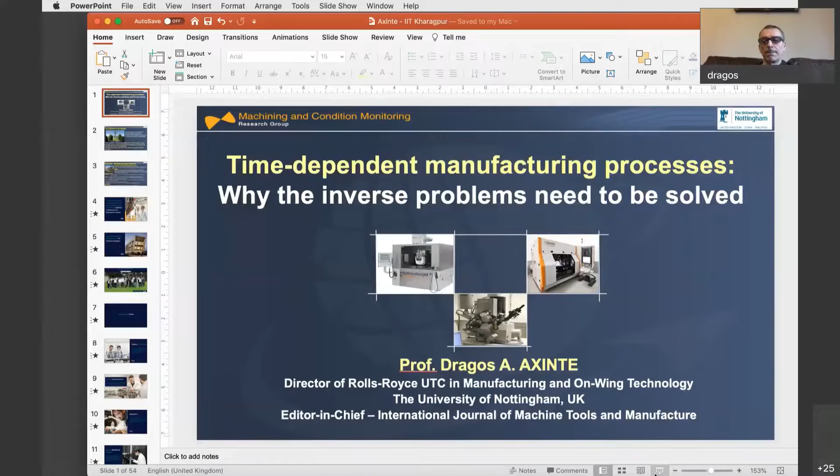Thank you very much first for the introduction. So let's clarify, my name is not Professor Axinte, my name is Dragos. Today I was a bit unsure what topic I should be presenting, because I looked at the history of what has been presented before, and I saw that my main topic is machining, but other reputable researchers have already made presentations related to machining, with surface integrity and so on. Although that topic is closer to my heart, I said let's change the pace and try to attract the attention of the young generation, the research community, to some interesting problems which might come from time-dependent manufacturing processes.

I will try to emphasize the need of solving the inverse problem. From time to time I might use a bit of stronger language criticizing why people have not been thinking about some topics, but that's how we should do a literature review - with a critical eye, otherwise there is no progress.

So my name is Dragos, and I'm also the director of Rolls-Royce UTC. Probably you might not know that it stands for University Technology Centers. Rolls-Royce has over 20 research centers around the world, and we are one focused on manufacturing on-wing technology.

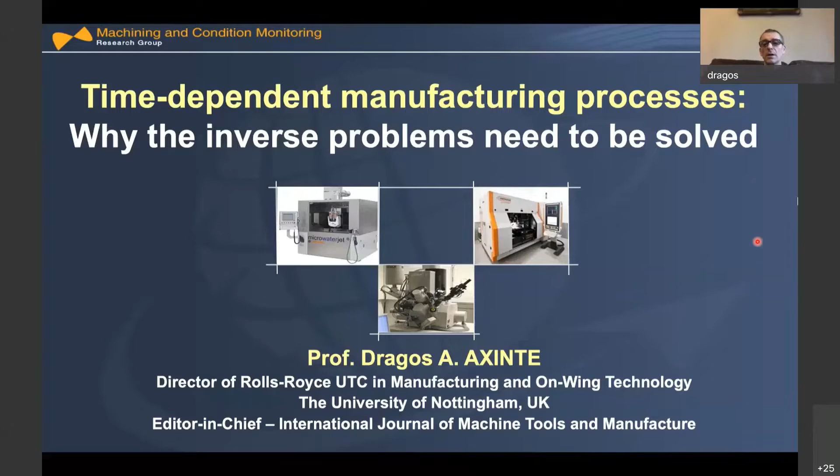I will make a short introduction. First, University of Nottingham, just to give you an idea - we are ranked number 8 in UK as a research power, and around 20% of our research comes from industry, with a good percentage of research considered at international standard. You might ask, who said that? The UK has a research body which evaluates us every 7 years, and actually now we are waiting for the new research assessment exercise results to come out.

So you can see, I'm presenting my group.

First we have Rolls-Royce UTC, which is a main source of collaboration. At the moment we're running over 30 projects with the company. We get funding from EPSRC, our research council, and we've been coordinating a good number of European projects. We also get money from industry, and from a body called Innovate UK, which is more applied research. So we have a mixed portfolio of research income.

Just to give a bit of introduction to what we do under our Rolls-Royce UTC, we have been established more than 20 years ago. Actually, we are the only research center in the world which has a full Trent 1000 engine for demonstration of our technology. The picture you see here is actually a full engine, in our labs.

What we do, we are based in the division of manufacturing. This is the new building we are in at the moment, and this is group 20. At the moment the group is over 40 people, and we have different strands, which I'm going to present shortly. One is robotics for in-situ repair.

That's why our UTC is called Manufacturing and On-Wing Technology. Just to give you an idea, sometimes the inspection of very complex installations needs to be done, and in some cases it's very advantageous not to dismantle the installation. So imagine an engine on the wing of an aircraft.

This is inspected at regular intervals, and if defects are found—for example, a blade that's been distorted by the engine ingesting a small stone—the airfoil might be a bit distorted. There's a particular procedure: this has to be blended, so the indentation is removed. And for that, there are no such tools currently available.

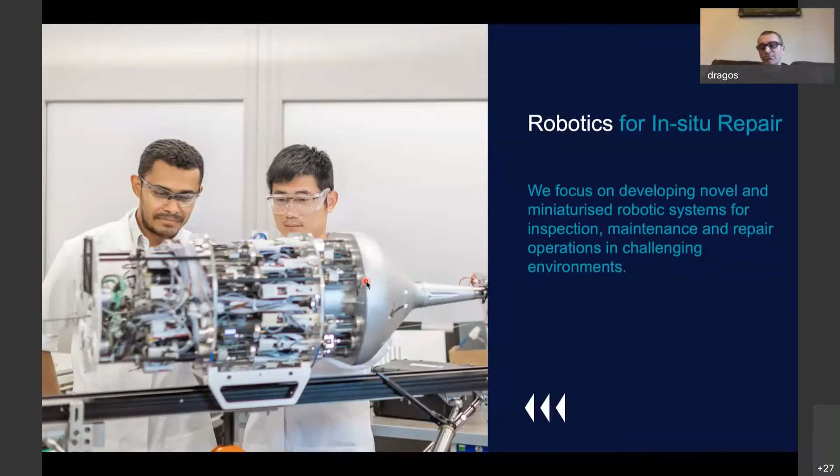Next, we do innovative tooling and fixturing within the Rolls-Royce UTC. Why do we do this? You can buy the most expensive machine tool and the most performant cutting tools, but if you don't position the workpiece relative to the tool precisely, or if the workpiece starts vibrating, it's not the best solution. Most people spend a lot of time looking at how to minimize vibration, for example by adjusting cutting parameters, but very few people have looked at how to do that from the workpiece point of view—that means the fixtures. So we've spent more than 10 years developing innovative fixtures for the company.

We also have a group in mechatronics, and you can see the robotics ties up very nicely with the mechatronics. We make systems which can get in situ on large structures to make repairs, and also end effectors. Because if you want, for example, to make deposition of a material—to give you an idea, to make this in-situ repair in the gas engine, you have access ports which can be as small as 10 millimeters or less. So how do you introduce a tool there? You might have a snake arm, as I mentioned, but you also need an end effector which has to be small. So we don't work only on robotics, but also on mechatronic systems and miniaturizing end effectors.

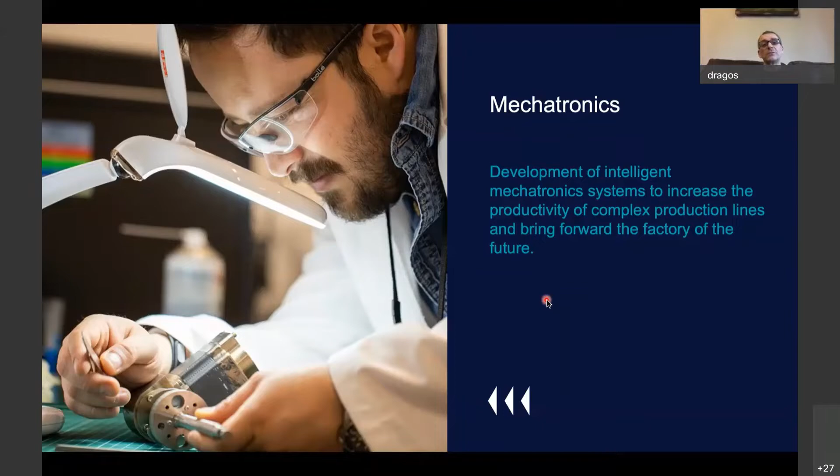We also deal with advanced manufacturing technologies, and our lab has quite extensive equipment, from 5-axis machine tools to lasers ranging from micro to femtosecond. We have 2 water jet machines, EDMs, so we are very well equipped in this area.

But what makes us somewhat different from most machining groups around the world is that we have facilities in-house for advanced material analysis—SEM, TEM, focused ion beam, EBSD, TKD, all these techniques. Our guys do it themselves; we don't rely on external material people. Everything is done in-house.

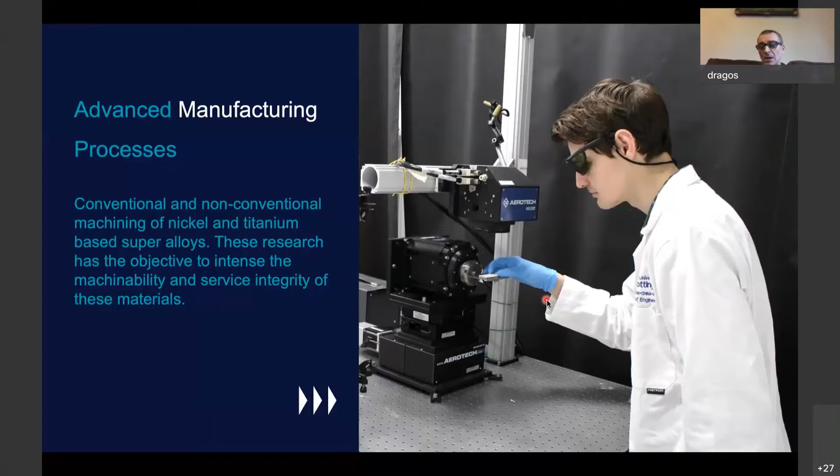So what we make there is the link between manufacturing technologies and understanding what happens at the material level. I was supposed to talk about time-dependent processes, so let me start by making you aware what I mean by time-dependent.

Let's consider an energy beam, which can be an abrasive water jet, a laser, or a focus ion beam. These are three very different processes, but what do they have in common? Nothing else than being an energy beam. They have an energy density, which we can measure by some means, and a time exposure on the surface. These three processes I will refer to throughout my presentation.

They are time-dependent processes. Let's compare a normal milling operation to emphasize what time-dependent means and its implications. If you move a cutting tool on a path, stop, but keep rotating the tool, material is not removed. But with energy beams, whether you stay in place, accelerate, or decelerate, you keep changing the eroded material.

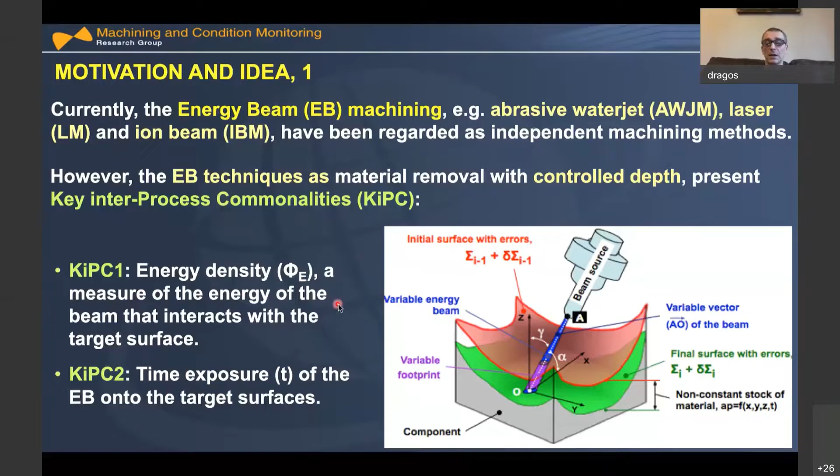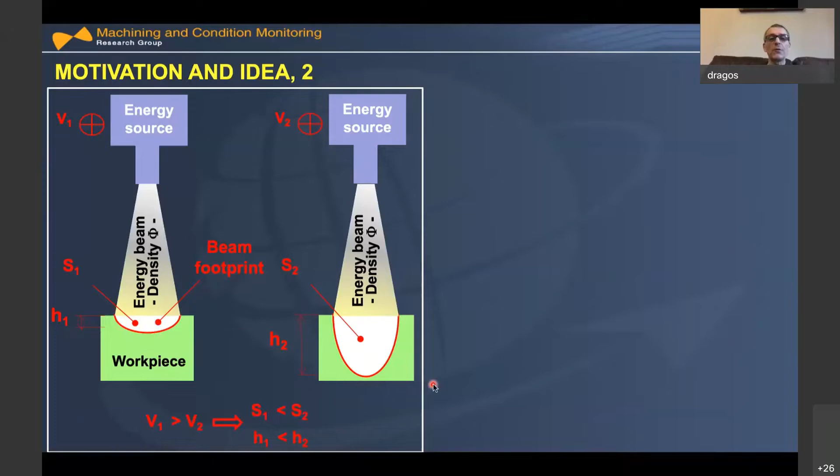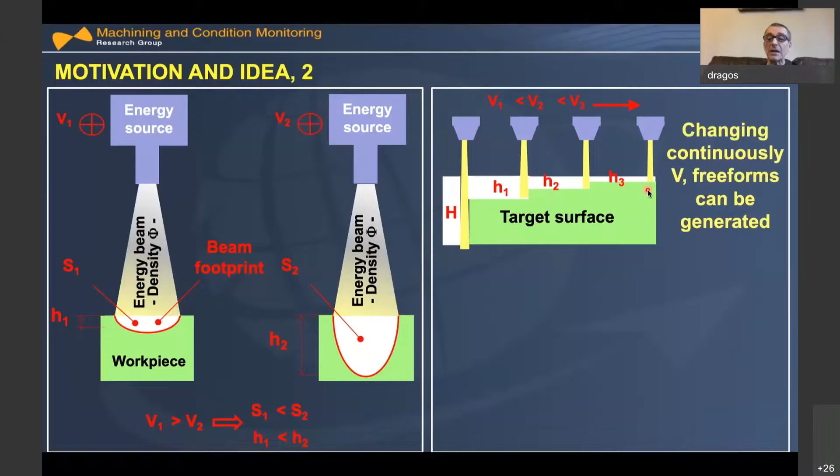If you go very, very slow, you can cut the material, but if you go a bit faster, you remove less material. So what is the philosophy behind this? How should we deal with time-dependent processes, for example beams which remove material?

Shall I try to change the operating parameters, like pressure pump for water jet? If you change the pressure, what happens? It will take some time - there's a time delay from when you change the pressure to when the penetration or footprint changes. So you cannot generate very complex shapes this way.

It will be much easier if I continuously change the feed speed instead. It's like cleaning a patio with a high pressure jet - if I go slower, I remove more; if I go faster, I remove less. So what's the strategy behind this?

If I change continuously in a way that I have a model linking exposure time with how much material is removed, and especially the shape of the footprint, I'm in business - I can generate very complex shapes. That might be the first part of the story, but if you don't start from a flat surface, the problem becomes very, very complex.

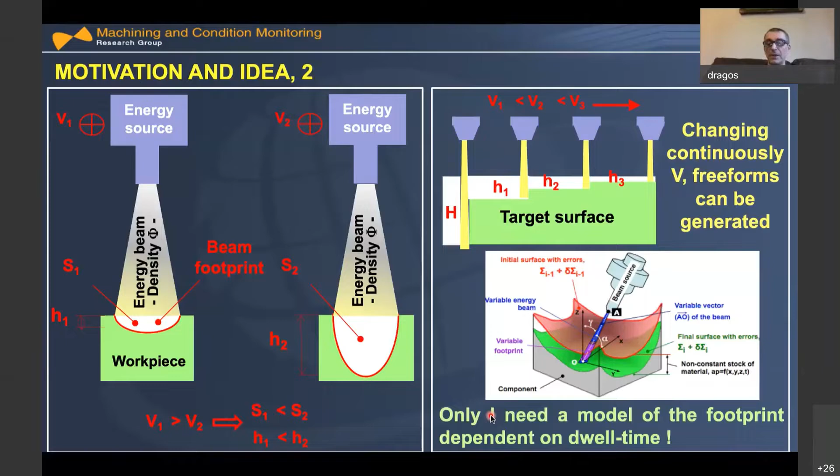So what I'm trying to get to here is there is an absolute need to know this shape, how the footprint of any energy beam looks like for removal of material, dependent on time. We will give some hints how this has been done. We have been publishing for more than 10 years about this topic. I think the motivation is, it's very difficult to generate free forms by water jet, laser, pulse laser. With pulse laser, I have pulses and I remove material and have to superimpose these pulses, and also for focused ion beam.

We developed a modeling framework which can address these challenges, and we proved this, published in Science Advances some 4 years ago. So here is more or less for the show.

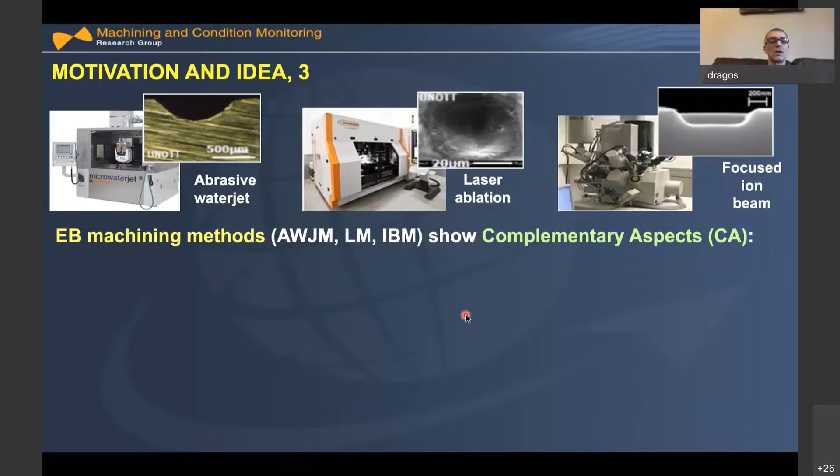We wanted to say that these three processes are complementary, and I will go a bit fast here. Dimensional accuracy - with water jet you might not obtain very precise surfaces, and what one process can do, the others cannot. For example, focused ion beam requires vacuum, while this one cuts any material. Anyway, I'm going faster here.

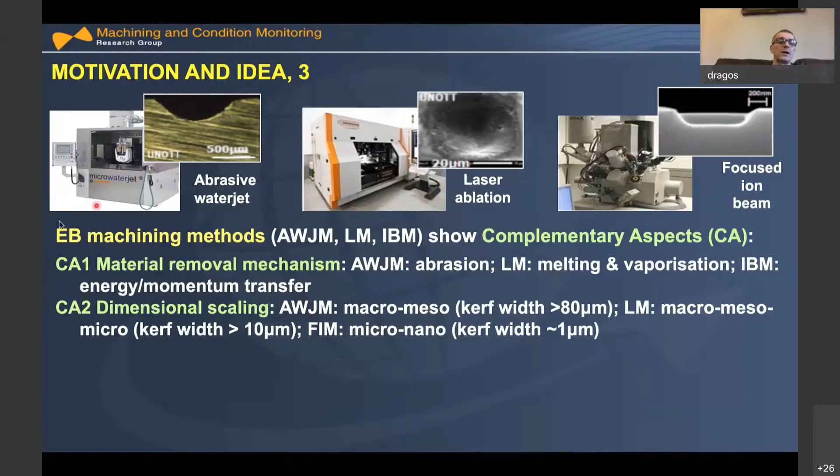The motivation - but what I want to bring you is this: why do we need this model? Why should it not be possible to just try different parameters, trial and error, and so on?

Here I'm presenting results from one of the projects with one of your colleagues from IIT Madras, Dr. Srinivas Devadula, done with us nearly 10 years ago. We did some milling on silicon carbide composites and titanium 6-4. You can see these are quite simple features - this is a pocket in composite material, here a ramp surface, a conic, a frustum, and a hole.

How we generated these surfaces - we tried different beam paths and adjusted the cutting parameters, switching the beam on and off.

Actually, I should have taken a piece of paper. Oh, just one sec, just one sec. I should have taken a piece of paper. Let me see where I have a piece of paper. Okay, yeah, good, just wait for me.

Yeah, sure, how are these surfaces generated? Look what I'm doing, guys - this is a Christmas card. I'm destroying a Christmas card.

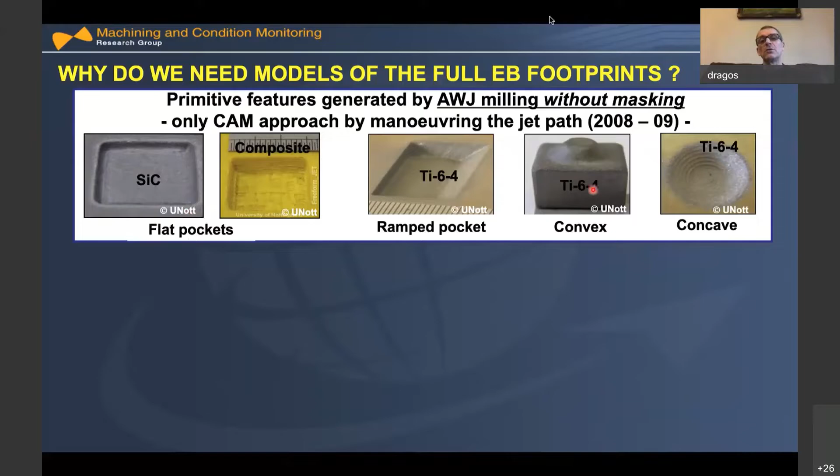When it came to pulse laser ablation, we had some ideas. Here you see some pictures of ablated surfaces on titanium diamond structures. What we wanted here was to generate some abrasive tools with controlled shapes of abrasives.

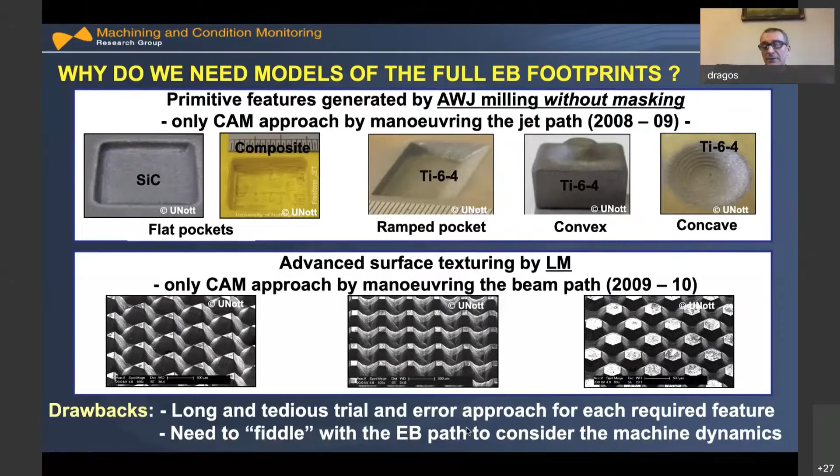Once again, we move the beam here without any modeling. It took us some time to arrive at these shapes. So what I'm trying to convey is that it's not rational to try different parameters this way. It would be so long and tedious, it takes a lot of time to adjust the parameters and move the beam intuitively.

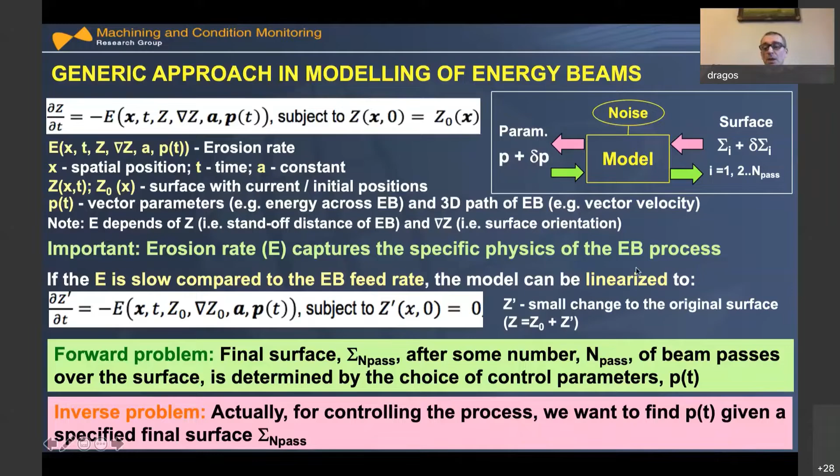So the forward problem is clear. Here's an example with a water jet: we have a jet which has to follow a path with a particular orientation. So first we try to solve the direct problem, because once you solve the direct problem and have the equation, then you can try to address the inverse problem.

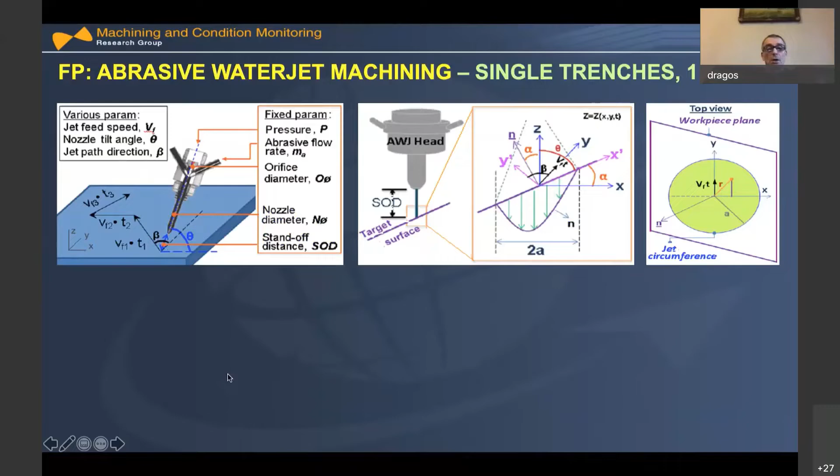So to keep it simple, this is the footprint, which depends on time, the orientation of the jet, and also the etching rate.

What do we mean by etching rate? Let me make it clear. What parameters am I keeping constant for the water jet? I'm keeping the pressure constant, because I cannot change the pressure very fast in the pump, and even if I change it, it will take a while until the velocity of the jet changes at the exit of the nozzle.

I'm also keeping the abrasive mass flow constant, for the same reason, since there would be a delay from the time I change the mass flow of the abrasives. I'm keeping the orifice diameter and nozzle standoff distance constant. What I'm varying is the feed speed, the orientation, and the jet path direction. The feed speed is nothing else than time.

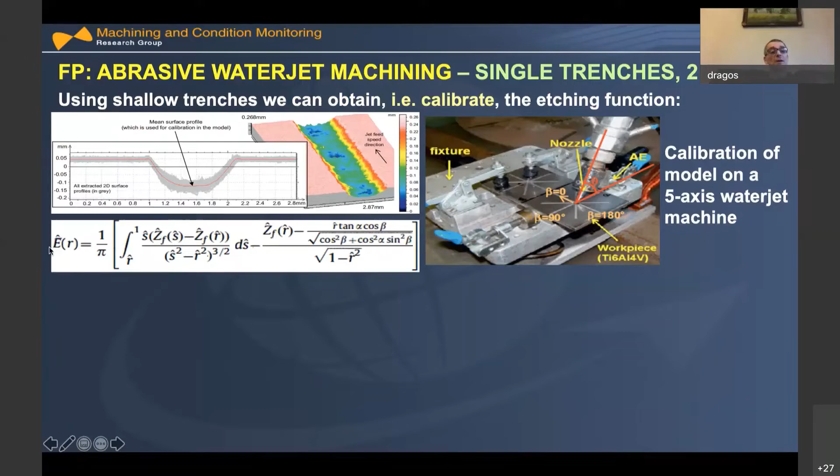So the whole idea is: I make a single footprint, a single trench, at high speed. I linearize the equation. I scan the footprint, and since I know the shape of the footprint, I can calculate the etching rate. With the etching rate, after that, you can predict.

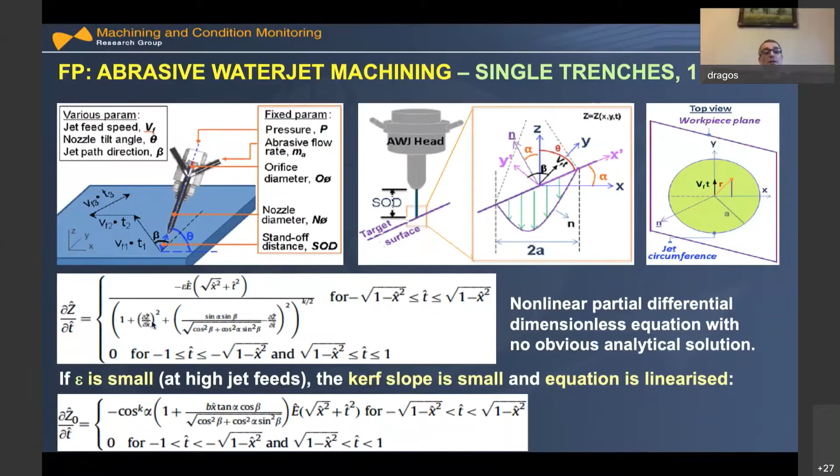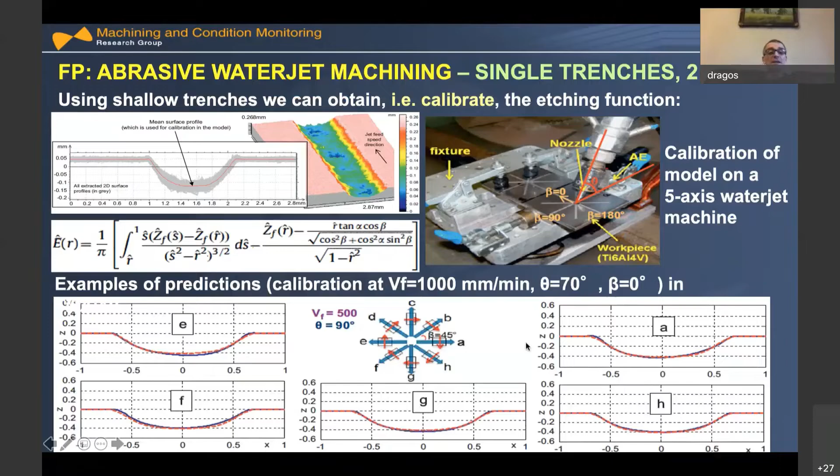Let me go back. If I know the etching rate here, after that, if I change the time, meaning the velocity, I can calculate how this trench will change with different feed speed. So it's exactly what we prove here, that with the calibration for the etching rate, we start changing different velocities.

So once again, what is the principle of this one? I include all the physics of the material removal for a particular energy of the jet, meaning pressure, in this case for water jet. And I calibrate this etching function. If I calibrate this etching function, I can use that generic formula, which takes into consideration the time, how the jet footprint varies with the time.

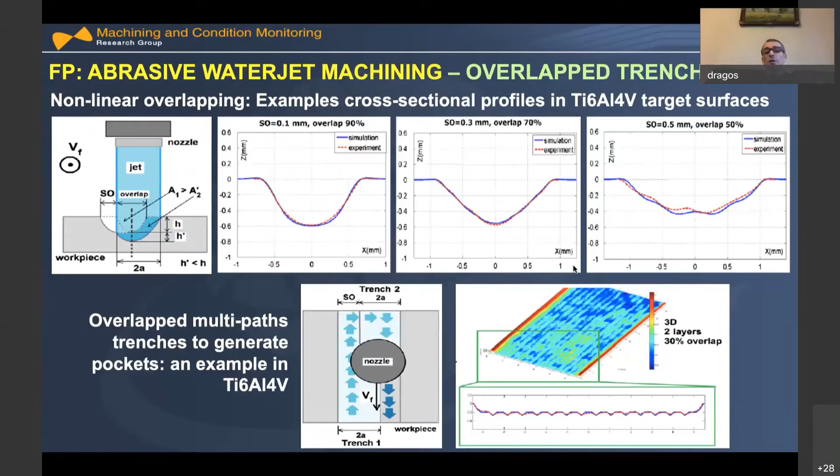Okay, so that is for the water jet. I will have some proofs later on of more complex surfaces, but the first example for this dwell time or time-dependent processes was water jet.

So I have a series of pulses, and each pulse will remove the material. So initially, I will make the story short here. Initially, what we have done, we try to model the surfaces you try to obtain by a series of pulses, individual pulses. So I say, okay, I have a pulse, I model a pulse, or a footprint from a single pulse.

And after that, I try to overlap them. You can see I have a pulse, we calibrate in the same way, we scan it, we see the etching rate, and after that, what we try to overlap it one by one.

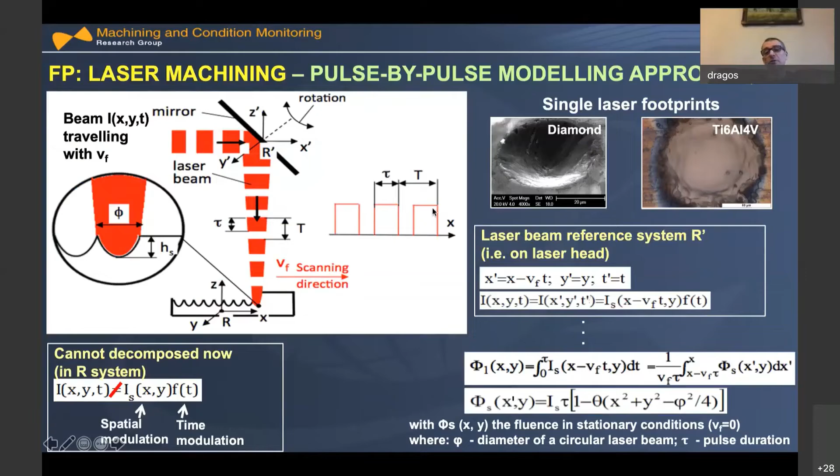Going back here, you can see the scale of this one is 20 microns, for example. So it's 40 microns, 50 microns, okay, 60 microns here. Now, if you want to generate a surface of millimeters, you can imagine how many pulses you have to simulate. You have to simulate one pulse, another one.

So it's basically what we say here, simulating and overlapping the pulses. Here the model has been verified only on linear trenches. So we said, okay, this might look okay pulse by pulse. Nevertheless, the situation becomes even more complex if you don't have a target surface which is flat.

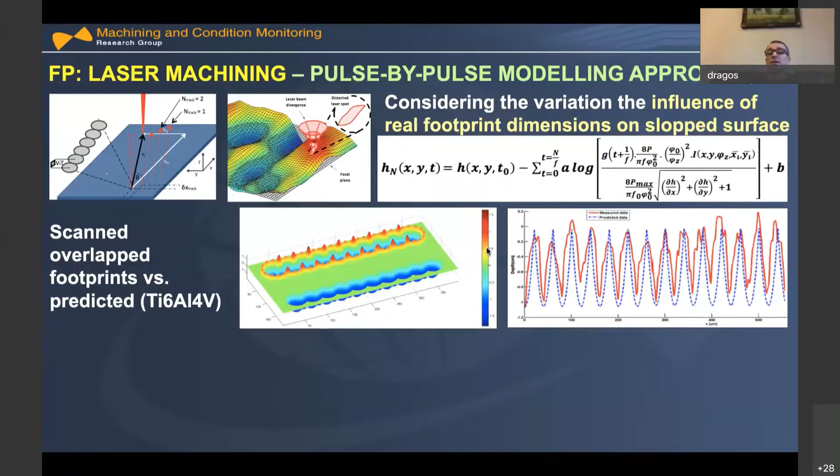So here with the same pulse by pulse, we try to simulate what happens, how is the resultant surface, simulating pulse by pulse. Remember, we are still talking about forward problem, meaning I decide the path, I know how it's the pulse, the footprint, and I overlap these footprints along the path.

And say, okay, I hope I will get a kind of satisfactory prediction. But this is a very simple path, it's a linear path. Of course, here I have some noise from the material redeposition because titanium 6-4. And here it's an example of a surface and error more than 10% between only a flat surface.

So the strategy here again was simulate pulse by pulse. You might need to simulate this convolution of a single pulse along the path, probably millions of them, which is computationally expensive, and probably, you can see also is not generating fantastic prediction. It's on a flat surface.

So, but we had after that we were thinking, actually, do I want to simulate such a thing? Meaning pulses which have a very little overlapping, but pulses with very little overlapping do not generate a smooth surface, right?

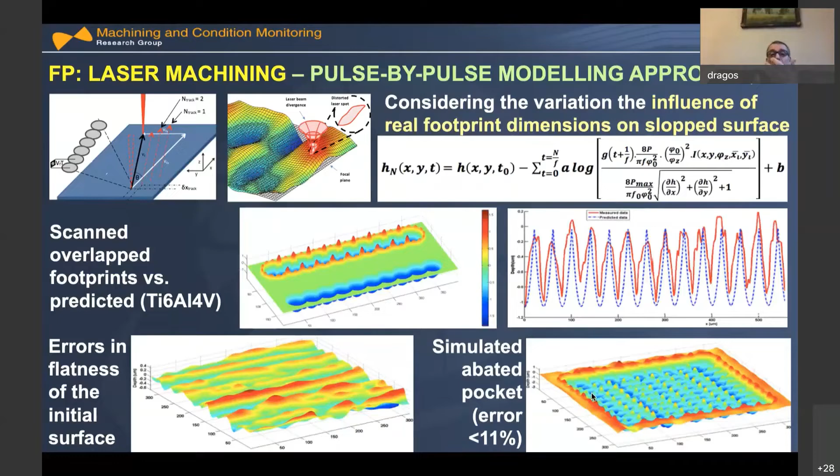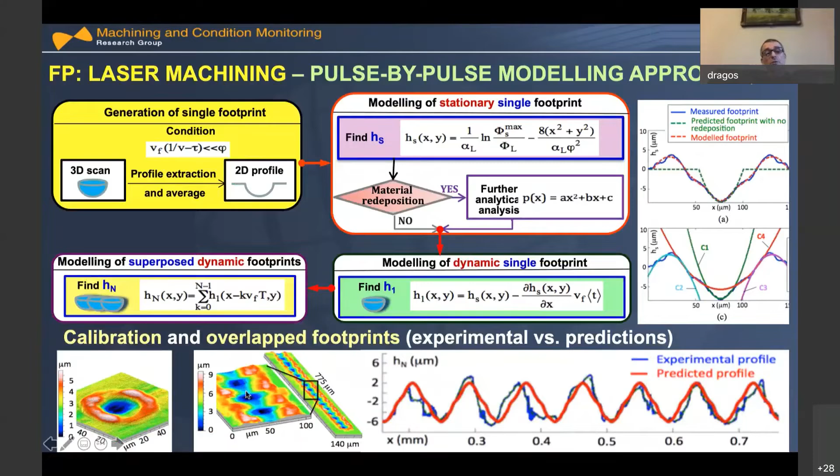So if I have a big distance between two pulses, yes, they have an overlap, but you can see here, I go back on purpose, if here it's wavy, we did this on purpose because we wanted to calibrate the model. But if you come closer with the pulses, what you will obtain? Actually, you will obtain a trench.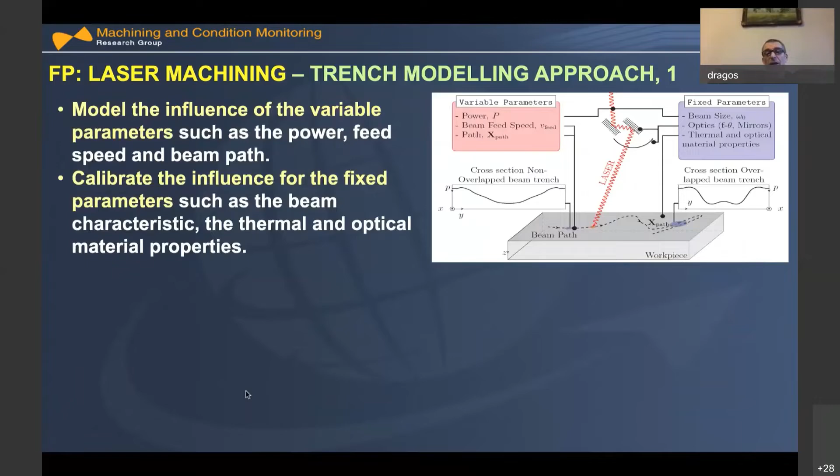So we were thinking, if we want to simulate a trench, is more or less the same as a water jet. Why should we be simulating pulse by pulse? I'm interested to generate smooth surfaces. If I want smooth surfaces with a pulse laser, what should I be doing? I should be trying to simulate trenches with the pulses, although they are individual pulses.

So here, once again, we came with the same idea. The trench, which is the footprint of the jet, results from many individual pulses, but with very large overlapping, so it comes out a smooth trench, more or less like a water jet. I have an etching function which will depend on pressure, on the power, feed speed, and the path. What we have done here, this etching rate is nothing else but how the material reacts to a particular energy of the laser, a particular standoff distance.

And here what we wanted to say is this etching rate depends on the power, feed speed, that means exposure time, and radius. What will the depth of the trench depend on? It will depend on the feed speed, how the trench will depend on overlapping, and how the trench will depend on the width of the overlapping.

So what we wanted to say here, we separated this etching function into one which depends on the power, and one which only depends on a generic shape of the profile. So what we do, we have 1, 2, 3, 4. So we have 4 unknowns for calibrating this etching function.

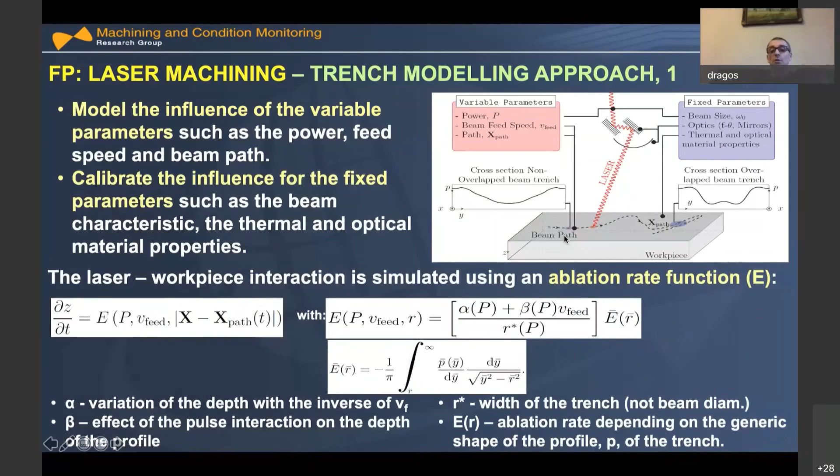So what we have done here, again, we did some trenches with a constant speed, we scanned them, and after that we had to make 4 trenches because we have 4 unknowns. We make 4 trenches at different powers, and after that we calibrate these parameters, alpha, beta, R, and etching rate.

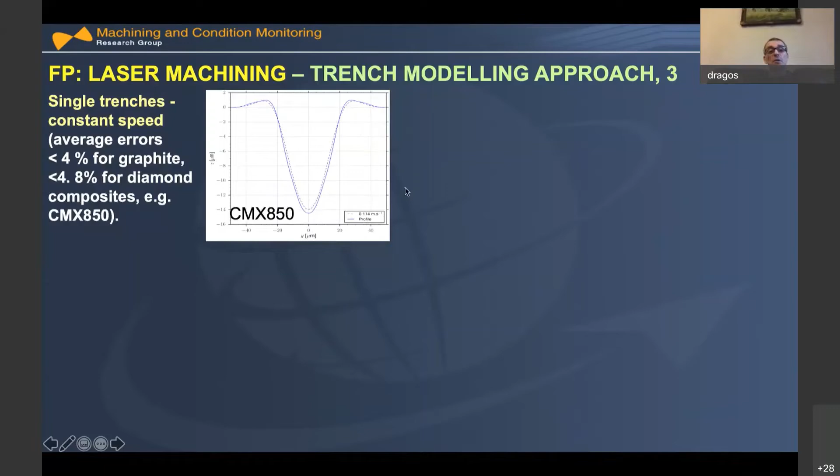So with this one, you can see this is a calibration, experimental versus modeling, on a diamond material. So this is the two footprints. But now, look, this is with zero overlap, now with more overlapping and less overlapping. Meaning overlapping, I make a trench, and after that I go sideways and do another trench.

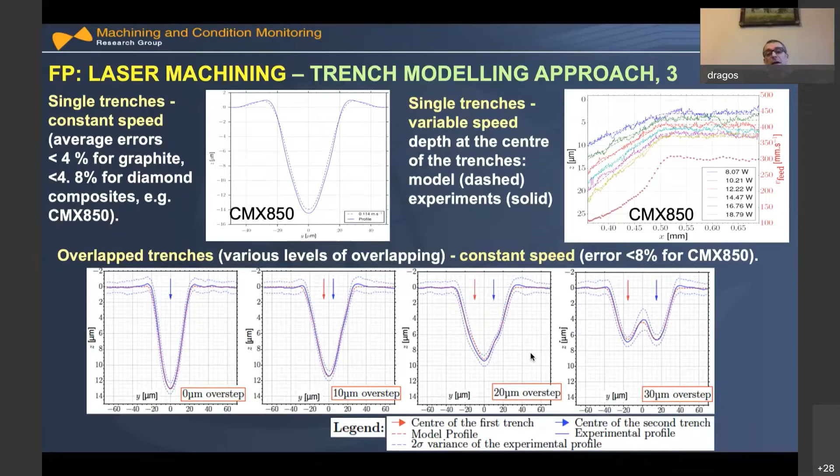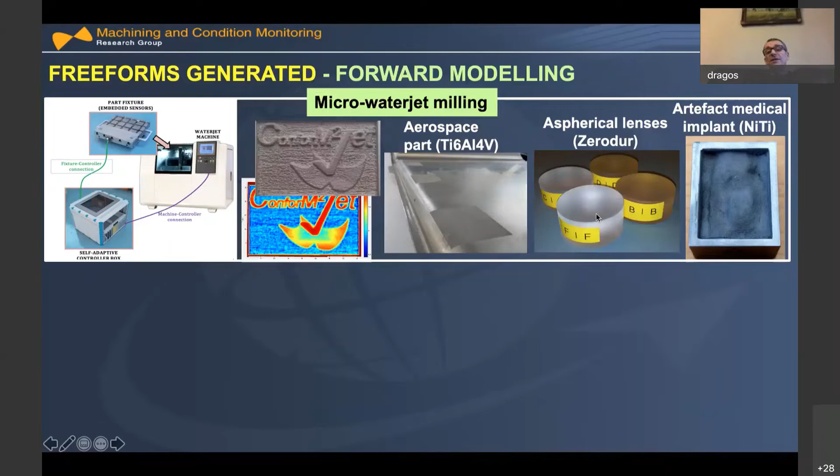Okay, so after that, we said, and I will show you later on, using this direct problem, forward problem, we start to manage to generate free forms. And you can see here a logo from the European project, milled on titanium 6-4 with a direct problem. And here on Zerodur, some surfaces, these are aspherical glasses, and here it's in NiTi material.

And after that, we use this model, the forward problem, for laser ablation to make even more interesting features. So what you see here is an abrasive element, which we published many years ago. We started from a flat piece of diamond and we started ablating the material around. You can see all of them, they are identical. All these teeth are identical. Look, it's 20 micrometers, very small.

And after that, small grinding tools in diamond. So we use these models to generate shapes of controlled geometries.

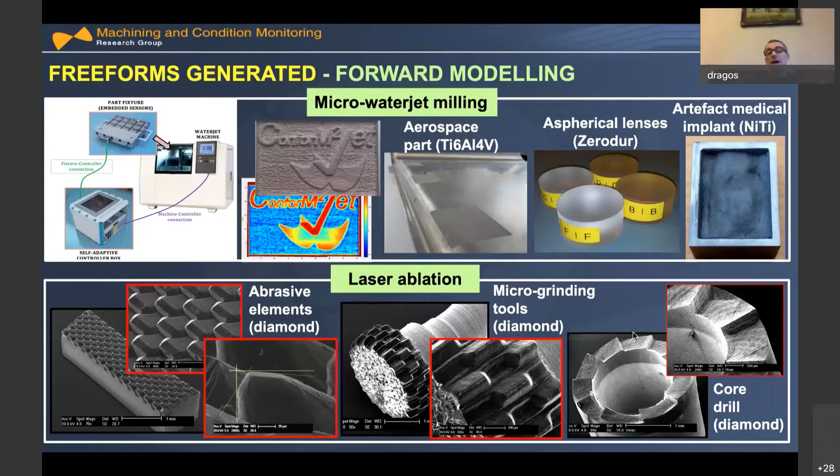Good, so up to now we discussed only about the forward problem, meaning I find the relationship between how the footprint of the removed material, the jet or energy beam footprint, varies with time and the path. And how we said, okay, this is the path, and this is the surface I obtained.

But actually, the real problem is the inverse one. Meaning, I tell you which surface I want, tell me which is the path. Before, we decided the path, and after that, based on the model, we predicted which is the surface.

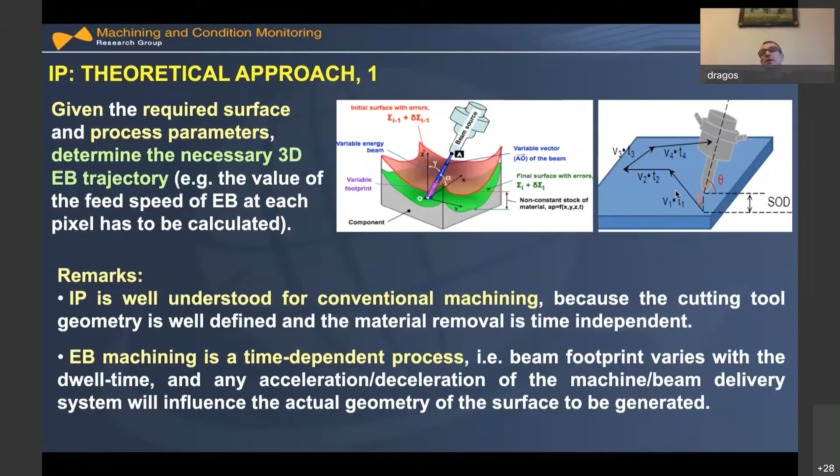Okay, let me explain roughly the principle of this. This is once again the surface I want to obtain. Here is the etching function, and here is the path, the dwell time.

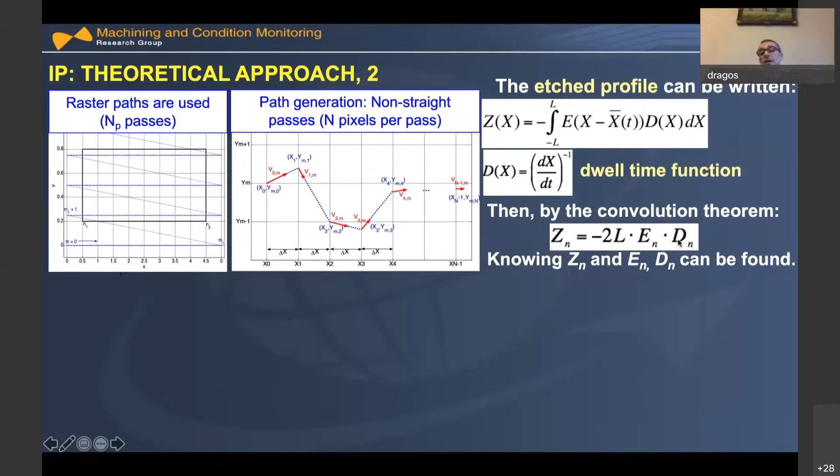We realize that instead of working in the time domain, we can work in the frequency domain, applying the convolution theorem. Z is the footprint, or the surface I want to obtain, in frequency domain. This is the etching function in frequency domain. Dn is the tool path in frequency domain.

So what is the principle here? How do we do it? I know En, the etching rate. I told you we can calibrate the system to find the etching rate. So I obtain the etching rate, and after that I transform it into the frequency domain.

After that, Zn is the given surface I want. What I have to do is transform it in the N domain. And after that, what is this? This is nothing else than the tool path which I want. So basically we obtain the tool path here, using the convolution theorem.

So what is the implication now? Let me make a comment. You have a water jet machine generating a jet that will erode and remove material. Imagine I start moving the head of the water jet on a particular path, but the head of the water jet is probably around 400 kilos. So if you start moving left and right, it's impossible for the dynamics of the machine, meaning the delay in executing particular moves with particular acceleration, to respond instantly. What will happen if I have a variation in acceleration?

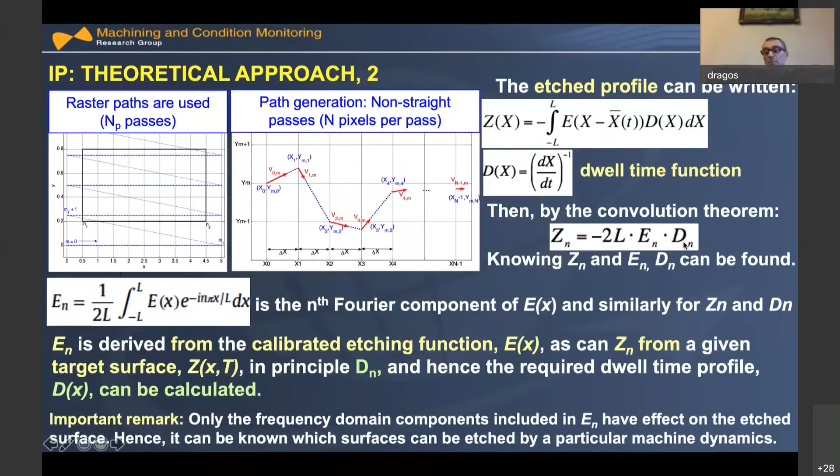So what I'm trying to hint at here: we have a tool path, a dwell time, let me go back. I can obtain this in the frequency domain, and after that transform back to the time domain. I can have this, but the path, if I put it on a system like a water jet, where I have big masses to move around, the machine might not execute exactly the velocity, might not be able to respond exactly to the path you are asking.

But of course you might say, okay, you might know the transfer function of the machine. No one will give you this information because it's proprietary to the machine tool builders and the controller. So what we have done is try to inversely derive, experimentally, the dynamics of the machine for a particular feed speed.

So what we have done: we introduce different functions into the machine. We say, okay, go from an impulse, go from this velocity and change that rapidly, so we see how the machine reacts. And after that we ask the machine to go with continuously increasing feed speed, or go around corners in this way, or make a sine function. In this way we were able to find out how the machine responds to particular stimuli.

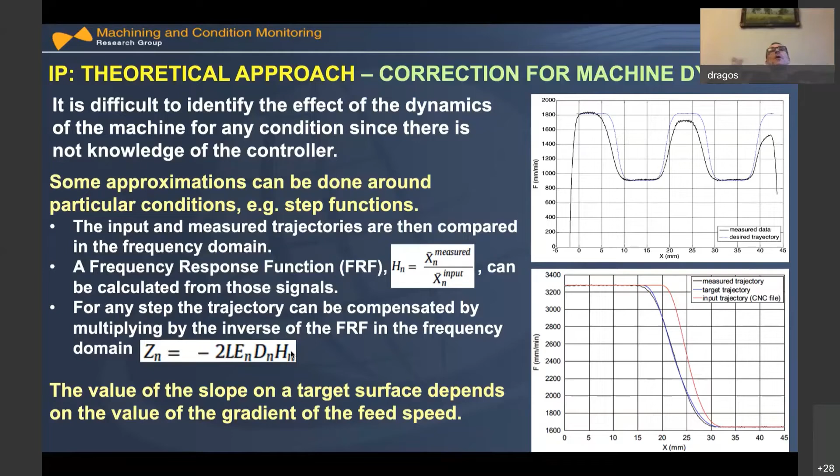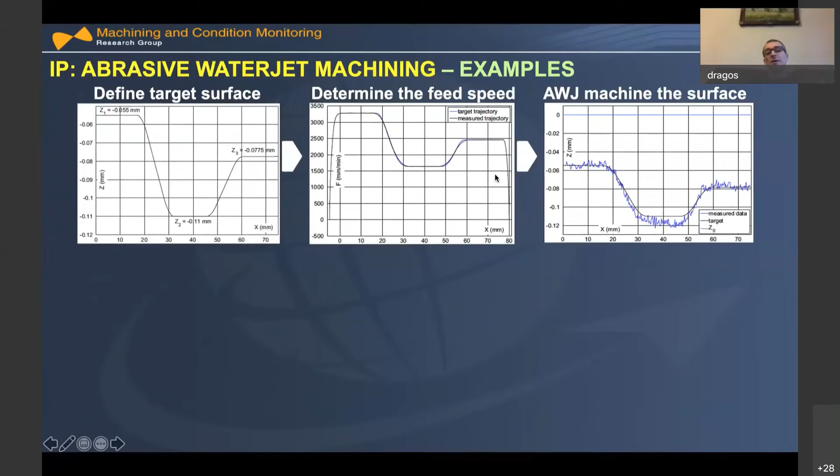Of course, such a correction function was not needed when dealing with the laser, because with the laser you move only some micrometers, so there is very small inertia. So here what you see is basically what I just said. After that, we replicate: we ask the machine to move once again on a particular path, and we have seen the machine replicates the path well, which we wanted.

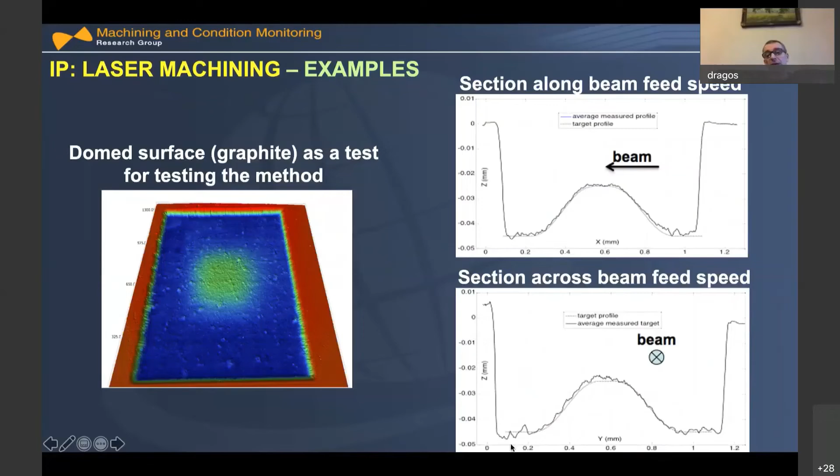And after that, we said, okay, let's try first a dome. You can see here the dome we generated with laser machining in this case. But actually, I wanted to come to these pictures. Here you can see with the inverse problem, it's much more precise. We could generate a very smooth surface with the logo.

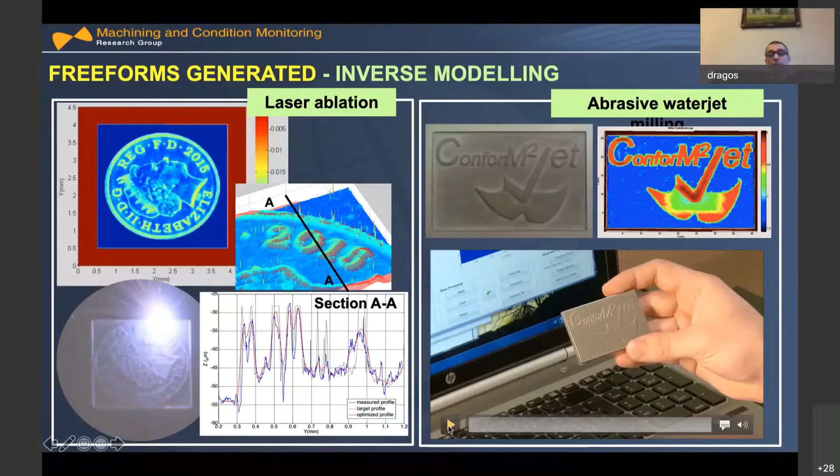I can play the video, but I think I still have some slides to go, so I'll move faster. I want to stop here on this picture, which is from a paper we published in Science Advances some years ago.

You can see here a feature. We could generate different features with three different processes, but we know science journals don't want to see cutting tools and so on. That's why we decided on the Mona Lisa. This Mona Lisa has been machined - this is with water jet, this is pulse laser, and this is focused ion beam.

All of them are based on the same principle of solving the inverse problem, and based on the same idea. I have an etching function which I calibrate. The rest is where all the physics are included for that particular duo - the particular coupling between the particular beam energy and particular material.

So what I need is to do some trenches, calibrate the etching function, and after that you can see here A, B, C, and A, B, C. You can see the errors, how small they are. We're talking about, over 30 to 35 millimeters by 35 millimeters square, with a machine that has a head in excess of 500 kilos moving around, yet pretty low errors.

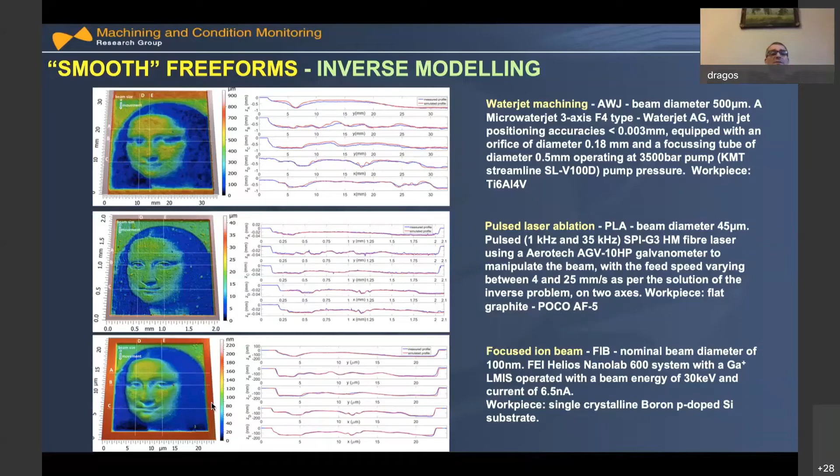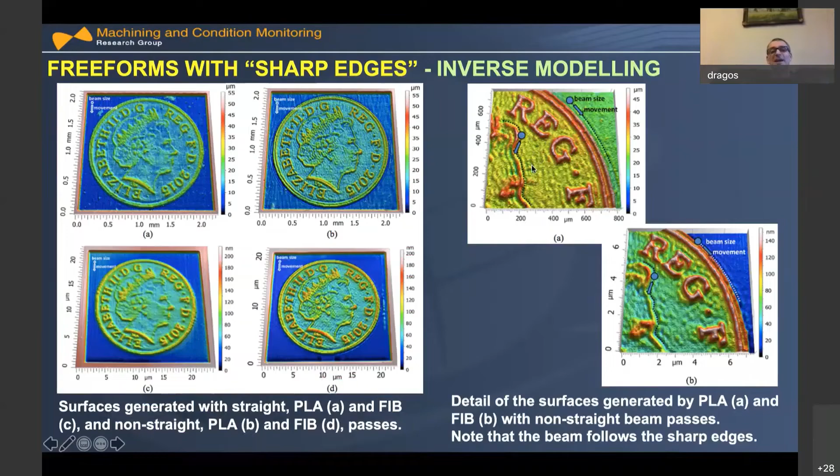Here are some examples also from the same Science paper, showing how we generated small surfaces. You can see the beam doesn't need to go raster - left, right, left, right. The optimization method will come up with the beam path, which is not necessarily linear. That's the whole point. I'll show you an example of other processes which should be treated properly - meaning treated with the inverse problem.

Let me show you a paradox here. People talk about laser assisted machining - okay, fair enough. So what is the principle of this? With some source of energy, for example laser, I come and heat up the part in the front. After that, the cutting tool comes into a softer material and removes it easier. This solution is very convenient, and you can publish a lot of papers, but it doesn't have too much science in it. Let me explain why.

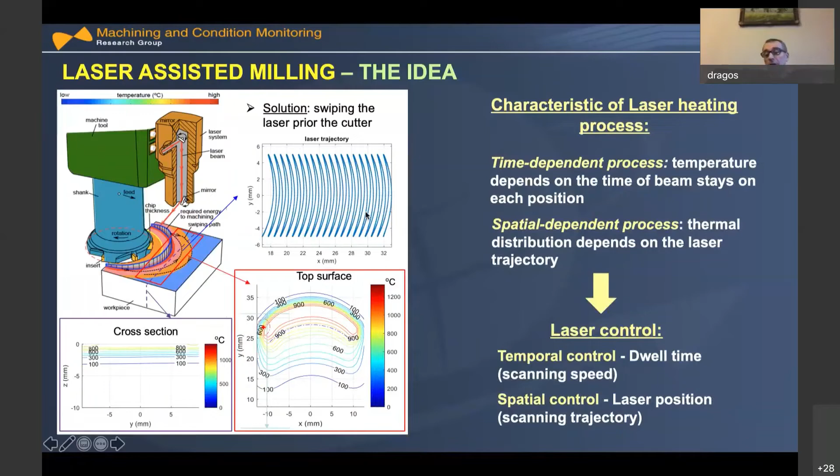So here will be the cutter, right? Here it will be the beam in the front. I have to move the beam in such a way that I obtain as constant as possible temperature. What does it mean? That probably the beam path has to be optimized in the front, or probably the beam path and the speed as well need to be varied.

So here you have an example of an optimized solution. This is without optimization. Of course, here where you reverse the beam, left, right, you start building up temperature, so it's very unlikely you obtain a constant temperature. While here, what you see, we optimize the speed. So basically we said, okay, I want an arc, but change the speed all the time in such a way that the temperature is constant.

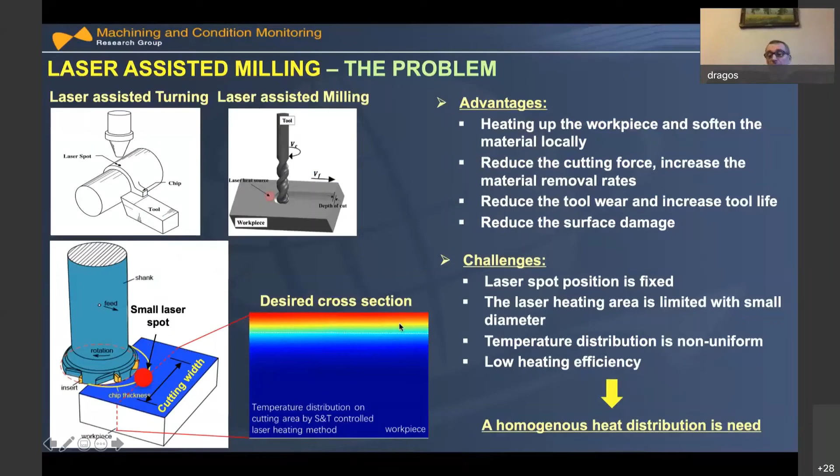So again, what was the necessity? First, if I want to use this for laser assisted machining, I have to move the beam in the front, but how do I move the beam in such a way to obtain constant temperature at a particular depth? This is the chip thickness, and I want the temperature to be a particular value. In this case it was Inconel 718, and we know when the gamma prime, which is a strengthening phase, goes into solution.

So we know which temperature, it's around over 700 degrees. We wanted, okay, in front of when the cutter comes here, you heat here, but when the cutter comes exactly at this point, what will happen? I have to have over 700 degrees at this chip thickness, so the material can be removed more easily.

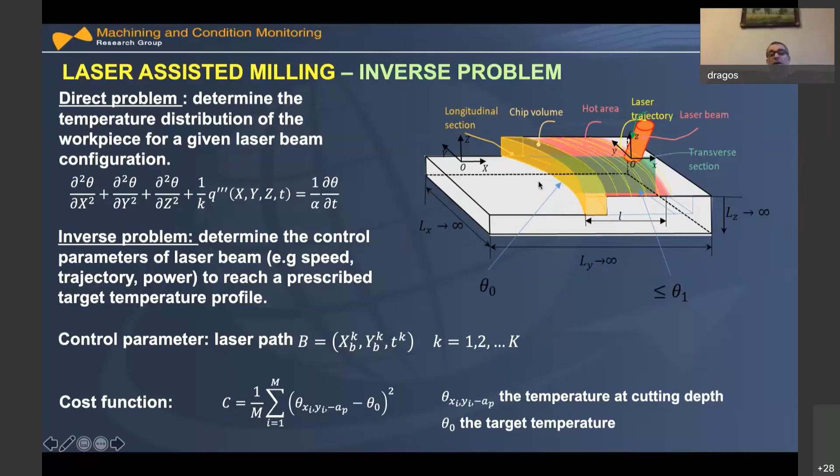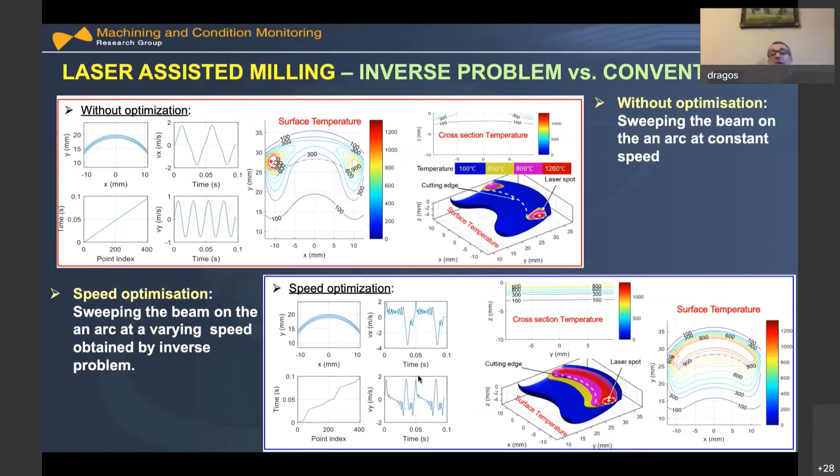And how did we do it? Again, we solved the inverse problem in this case. Here is presented the speed optimization. You can see the speed is varying during the path. Is it possible? Yes, because the galvo is very, very time responsive. And here you have an example, so we have an infrared camera here.

And here what you see, this is the milling cutter. Let me see the camera. Yes, here it's a single spot. Now I sweep the spot, the laser, and after that I switch it off. So what will happen? Here I have a single spot in the front. Of course, it's not doing anything because the cutter has a big diameter, around 30 millimeters.

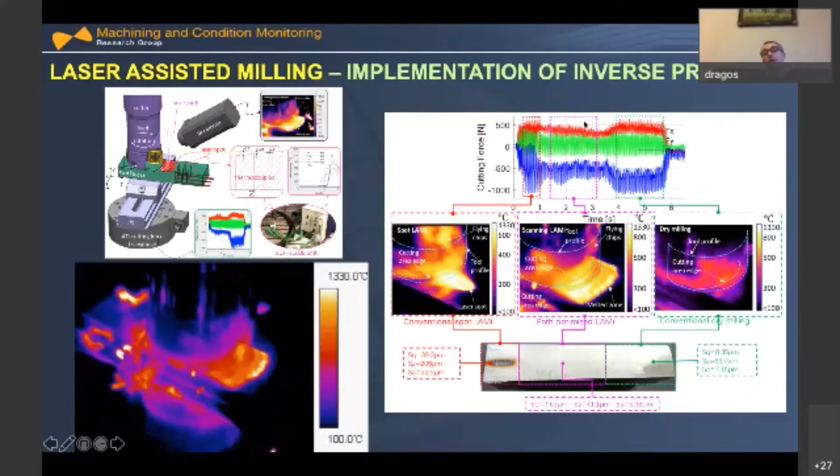While the beam diameter is around 2 millimeters, so it's not doing too much. And of course, here what I do is overburn the surface, burn the surface. So: stationary spot, sweeping the spot, and after that the laser switching off. What you can see here, of course, is that you can soften the material and remove the chip more easily.

Sorry, it's been 1 hour. Yeah, thank you, Dragos. It's a wonderful session.

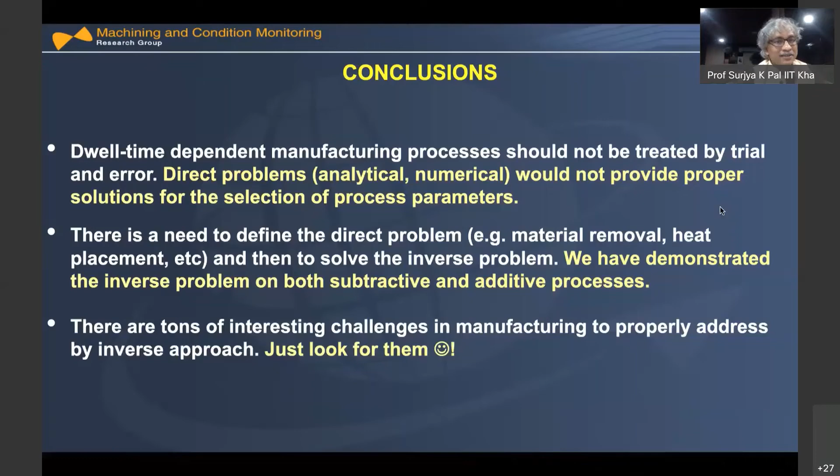You have given us insight about how the inverse problem in time-dependent manufacturing processes can be solved. You have given examples of abrasive water jet machining, laser based processes, and also the ion beam process. You have rightly told that for the inverse problem, the most critical thing is optimization of process parameters, given a surface to be produced. You have shown examples of the difference between with optimization and without optimization.

Just one question coming up in my mind. Yes, before. Please. Yeah, so before I proceed to my friends, the participants who are over there, and I'm pretty sure some questions will be coming up in their minds as well: how do you consider the material inhomogeneity when you are coming up?

Your inverse problem is defining the tool path and then other process parameters to be followed, optimizing factors like the dynamics of the machine itself, total machining time, energy consumption—all these things are being considered.

So how do you think material inhomogeneity can be tackled? How do you consider material inhomogeneity when solving this problem? Okay, so how did this originate? Actually, we had a European project. We are working on this problem.

Let's say it this way: if the material is theoretically homogeneous, we don't have a big problem. Basically I have not presented here—for example, we've also treated aspects related to material redeposition in laser processing. But the errors probably might increase with material non-homogeneity.

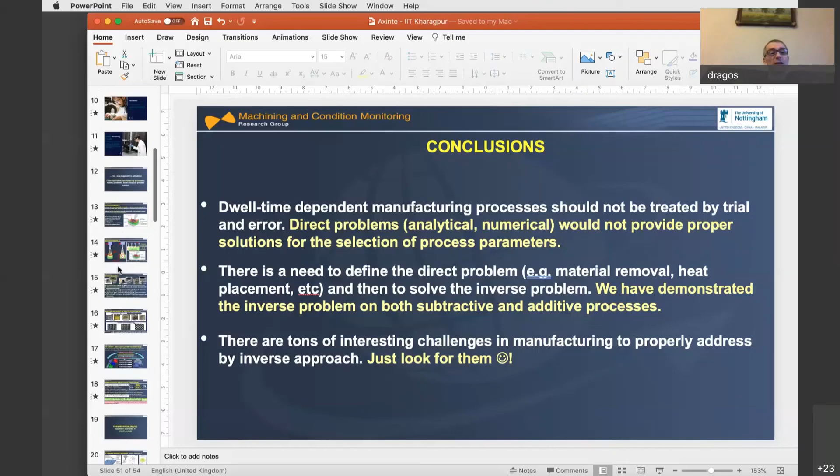And he has raised this: for a curvy, non-flat surface, do we need to adjust the angle of the beam? Yes, yes, we change the attitude of the beam. For example, on the water jet, we have the possibility to tilt, because the water jet is a 5-axis water jet, and we adjust the position of the beam—it's this one, yes.

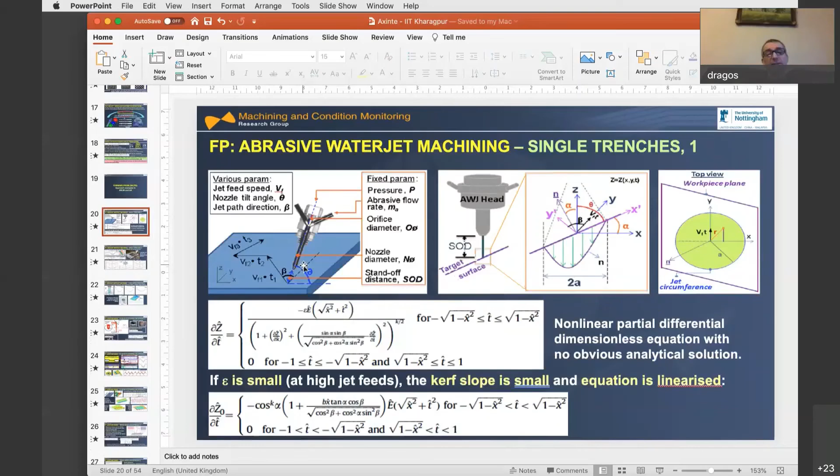Clear? Yeah. So another question from him: you gave some nice examples, like the Mona Lisa print. He asked, for such micron level machining, doesn't the vibration of AJM cause any deviation? Is it considered in the simulation?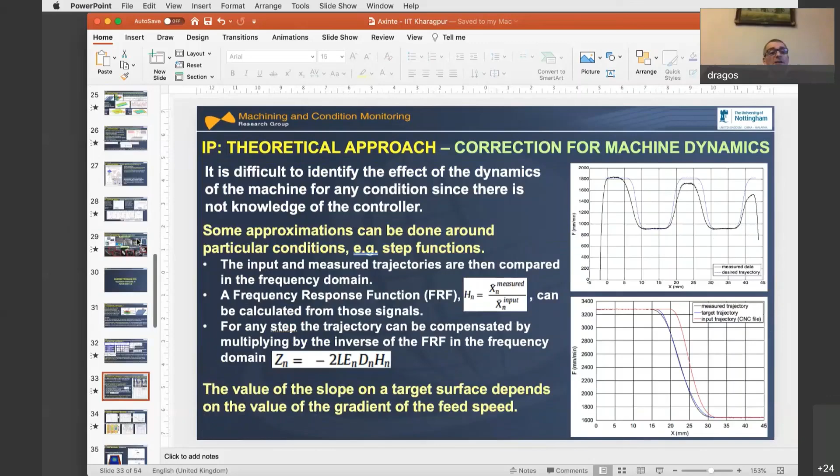The vibration of the system, this is exactly what we try to do here. Not the vibration, it's the dynamics. So basically we know how the machine reacts. The vibration, the influence of the randomness of the system, comes through on this kind of footprints.

That's why when we do these kinds of trenches, the trench is not constant - not because of vibration, but because of the randomness of the process. So indeed there are some variations, but all these surfaces I showed are based on average values. That's why we present it in this way.

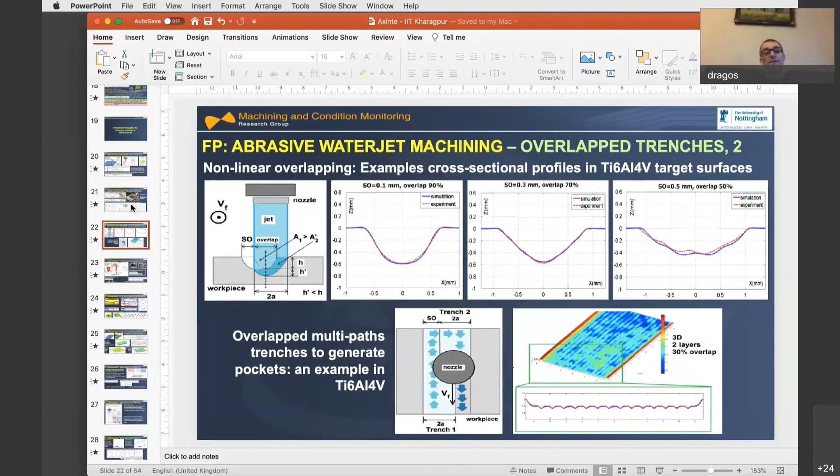Yes, indeed, the bigger the mass's movement, the more the dynamics will play a role - vibration or whatever. Actually, the dynamics has to be considered for all such process parameters, and it's more important for the inverse solutions.

And another question, from Pooja: how do you keep the desired material properties intact while performing the reverse problem? I don't understand - the materials intact? What do you mean? You know, the material properties do change as the process goes on, like the temperature.

That's a good question. Let me explain. For water jet, the material properties do not change, because it removes material with no heat. But for laser, it changes the reflectivity and absorbability. Yes, we took that into consideration as well - we calibrated this.

But at the same time, analogous to this question, the heating area is also going to change with the process parameters. So do you also take into consideration the profile of the material erosion or the material change?

Yes, for laser ablation, for example for the trenches, we considered how changes in reflectivity and absorptivity - all this laser-material interaction - will change from one trench to another. We published this in our journal some 2-3 years ago. But for other processes like water jet, there's no need because you don't change the properties of the material.